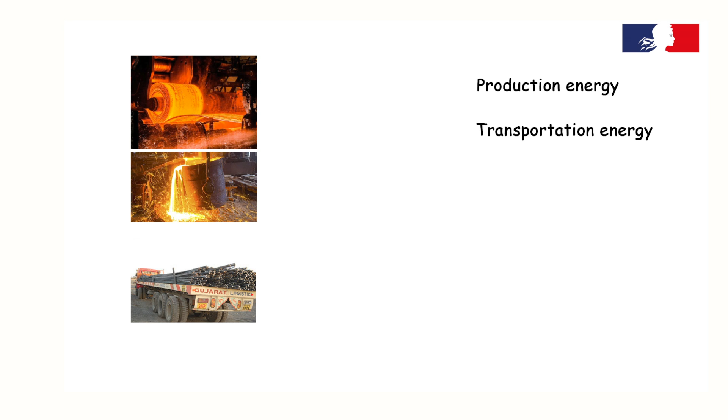The building industry contributes to global warming and climate change in many ways, starting from production of material at the factory and transportation to the construction site. The process uses energy called embodied energy, or energy used during the construction.

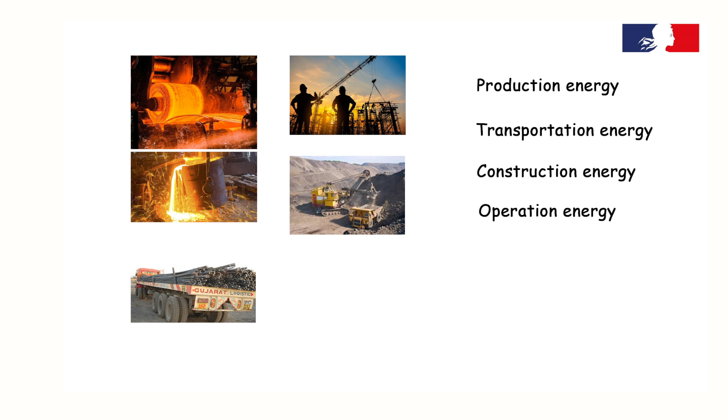Once the construction is finished, the building uses energy to operate: lighting, air conditioning, refrigerating, and so on. Once the building gets old, it is torn down to build a new one, causing lots of solid waste.

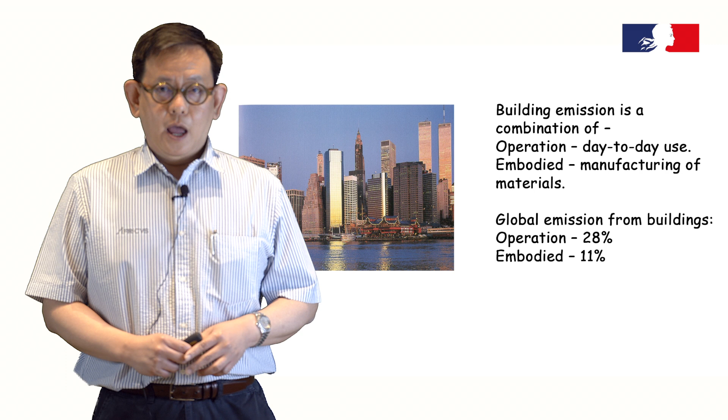According to the United Nations Environment Programme, or UNEP, building construction and operation worldwide account for 36% of energy and 39% of carbon emissions. Building materials account for half of the solid waste generated every year worldwide.

To construct buildings, we must consider how to use less material, how not to waste it, try to reuse or recycle, and how it will perform during operation.

The life cycle assessment of a building involves evaluation of the environmental impacts throughout its life, normally 40 to 50 years. During the design, we need to know ahead of time how much energy our building will use, how much wastewater it will generate, or how many kilograms of carbon it will give off. Beyond that, how we will dispose of our aged building, and any possibility to reuse it at the end of life.

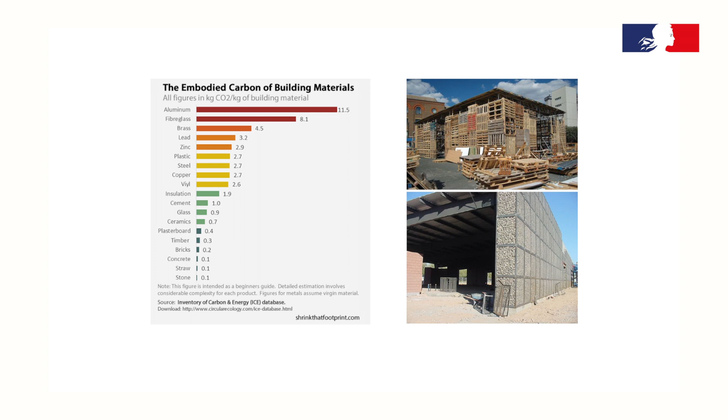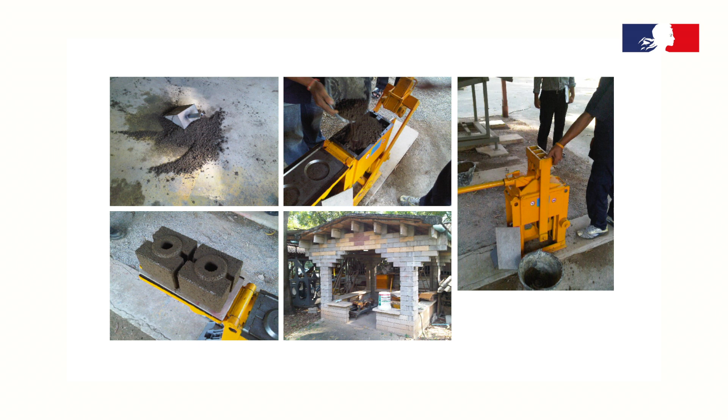There are data available for estimation of embodied carbon of building materials. Using natural material will reduce the carbon footprint of your buildings. Here are some examples of buildings in developing countries that use compressed earth blocks to build houses. Thermal energy can be saved compared with that used in typical bricks.

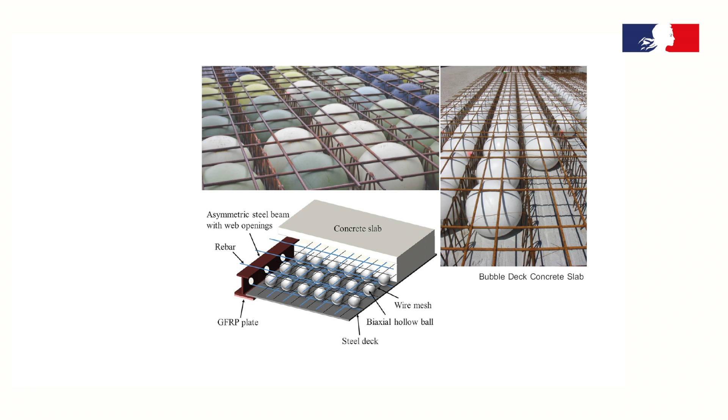Some buildings are looking for innovative ideas to reduce building weight by replacing concrete with plastic balls to save material and cost for the building structure. Some countries are trying to use low carbon material such as timber to replace high carbon material such as concrete and steel. However, do they perform better during operation?

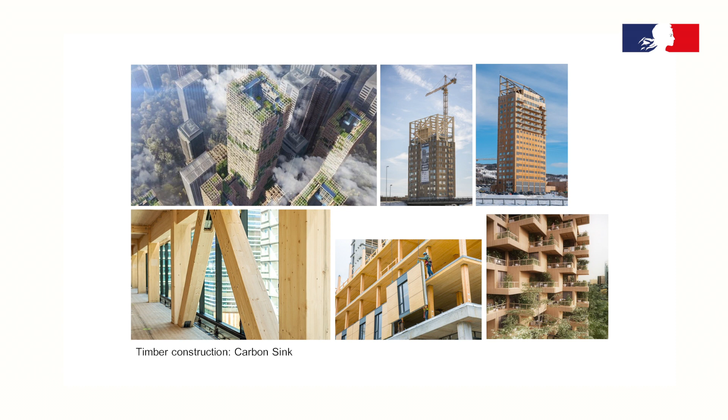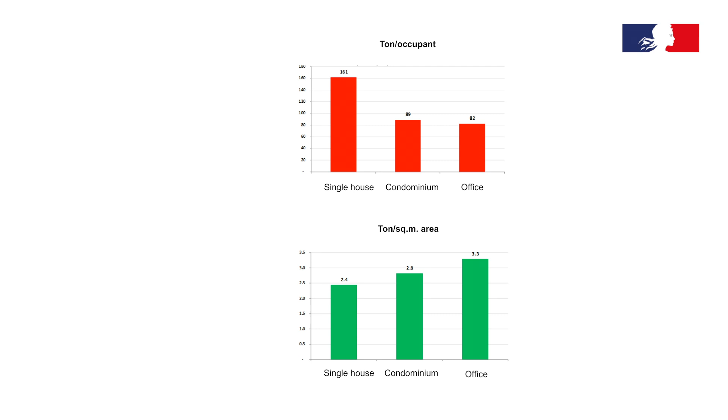A house in a hot humid region can emit 57% of its total lifetime carbon dioxide during operation, mostly due to the use of air conditioners. This number can be offset by the use of renewable energy. Also, the need for air conditioning can be minimized by following the integrated approach that was presented in video 1.7. However, the remaining 43% is caused by production and transportation of building material, which cannot be offset.

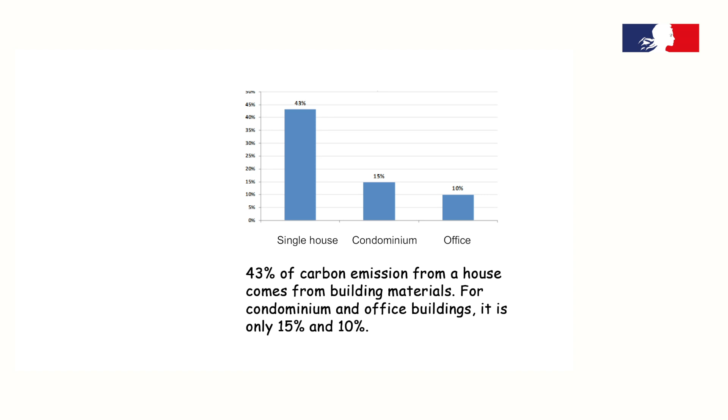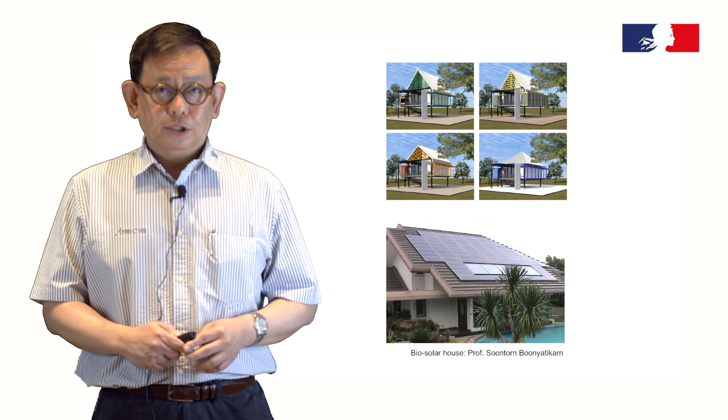Net zero energy use is possible through the use of solar energy and passive design. The embodied energy can be higher by 20% because of the energy used to produce the solar PV system, but operational energy can be reduced by 66%. Using passive design, the energy use of the air conditioner can be reduced by 50% without increasing the embodied energy. Moreover, lowering energy use will help homeowners cut investment costs in renewable energy.

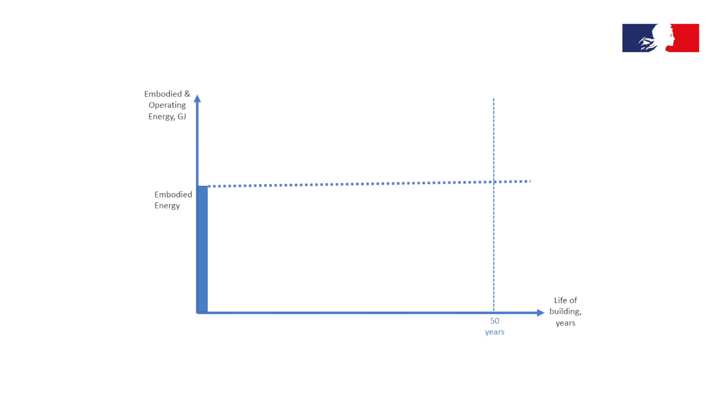If a house uses less energy throughout its life, 50 years, the greenhouse gas emissions that cause global warming and climate change can be controlled. If the building is designed poorly for the climate, then its lifetime operating energy would be much higher over its life compared to the embodied energy. If the building is designed with bioclimatic principles, then its lifetime operating energy would be lower, but still higher than the embodied energy.

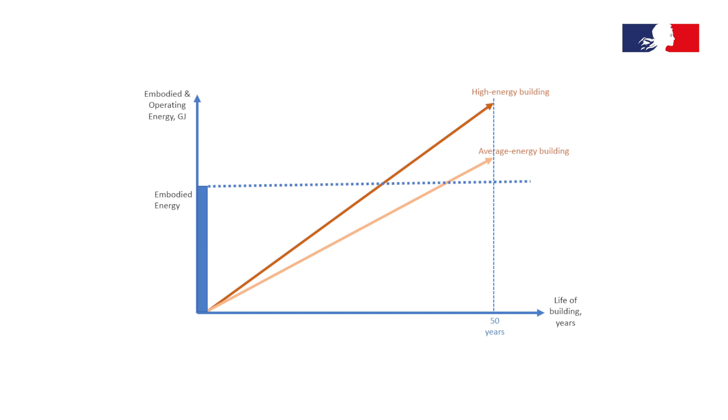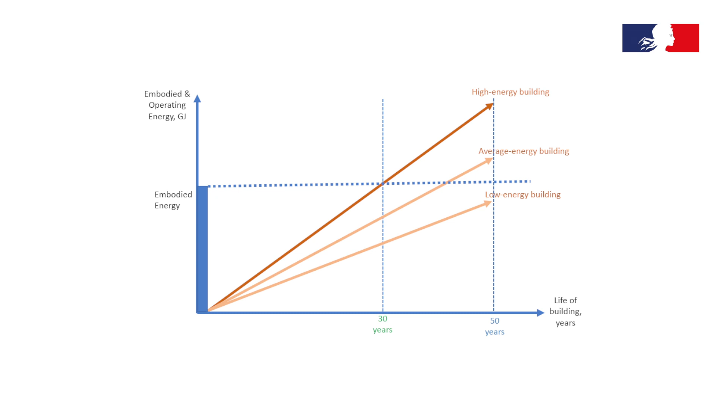If the building is designed with bioclimatic principles and energy efficient appliances, then its lifetime energy would be much lower, comparable to or less than the embodied energy. If, on the other hand, the building life is reduced from 50 to 30 years, the embodied energy will be more dominant compared to the lifetime operating energy. So, apart from considering the embodied and operating energy issue, it is important to also design buildings that last.